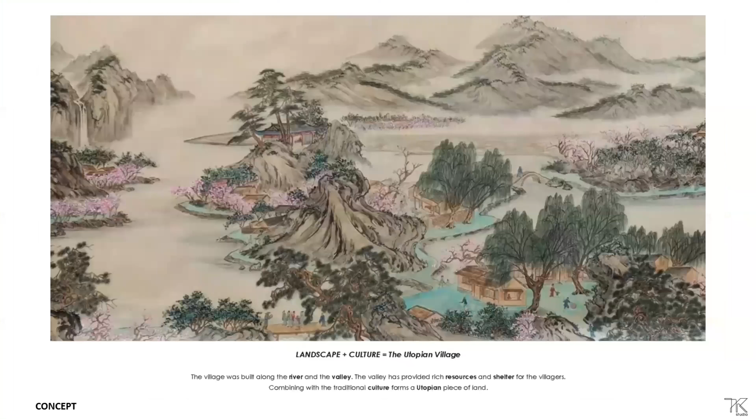Inspired by the famous peach blossom spring poem, we aim to create a pleasant landscape that is similar to the utopian landscape as in the poem. The ideal living environment situates in nature, where villagers are surrounded by mountains, the peach blossom trees and lake. The poem emphasizes the feeling of passing the threshold to disclose the heavenly landscape, which brings peace to the resident's heart. Art pieces inspired by the poem have illustrated the heavenly landscape.

Living in such an environment gives quality of living to the villagers, resulting in a happy and fulfilling life. So the villagers are very kind and warm to the visitor, creating the perfect society.

Mountain and all natural forces create different types of natural landforms, such as plateau, lake and river, and valley, which lead to different formations of human settlement. The landforms provide rich natural resources and shelter for the villagers.

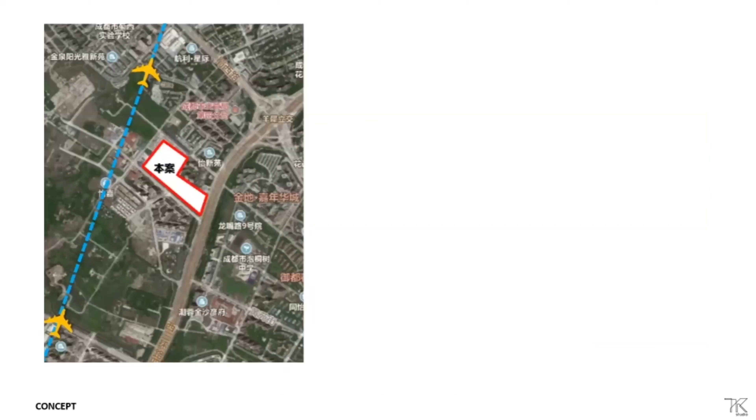We transform nature in this painting into a simplified form of landscape that fits with the modern lifestyle of the residents. We identify three types of landscape characters from the painting, namely the plateau, the lake, and the valley. These three distinctive landscape characters are favorable for developing human settlement.

The plateau is a broad and flat land, which can be used for multi-purpose activities. The lake has beautiful, picturesque landscape, allowing water activities for enjoying living. The undulating landform of the valley protects the privacy and maximizes security for the residents, while giving a sense of serenity.

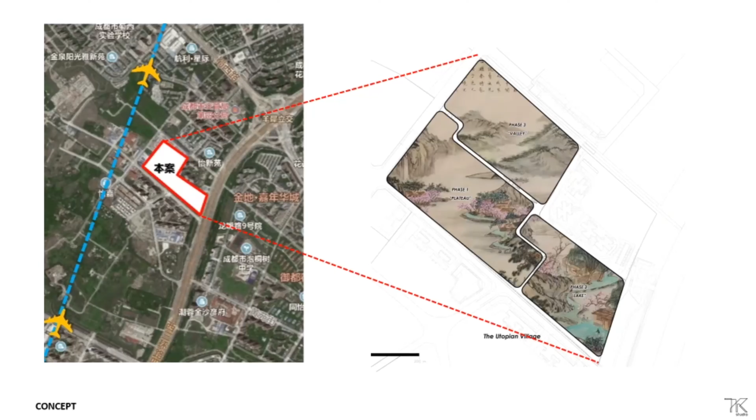The land is gradually deepened and ragged by natural forces and the flowing of rivers, forming valley, plateau, canyon, river, and lake over time. Over the years, tectonic movement and erosion create various types of natural forms. Everything is unexpected and organic, at the same time ragged and exciting, which celebrates the greatest value of nature.

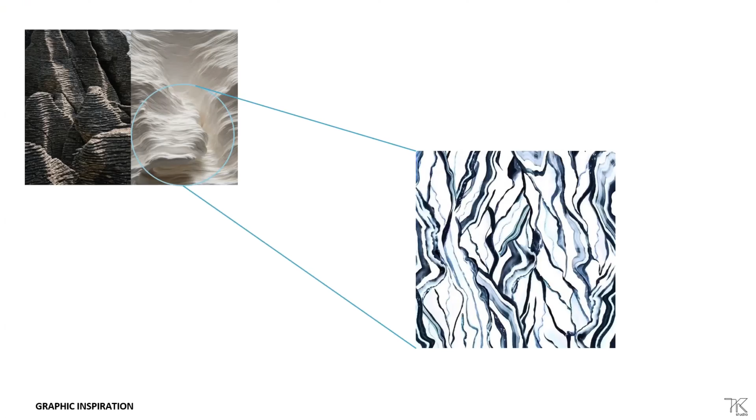The ragged line will be the main graphic form used in the project, symbolizing the result of the natural processes.

The plot of land will be divided into 3 parts and 3 phases: the plateau, the lake, and the valley. The 3 parts will be connected by a corridor of canyon. Entrances between plateau and valley, canyon, and forest will be the threshold where people enter the heavenly designed residential landscape.

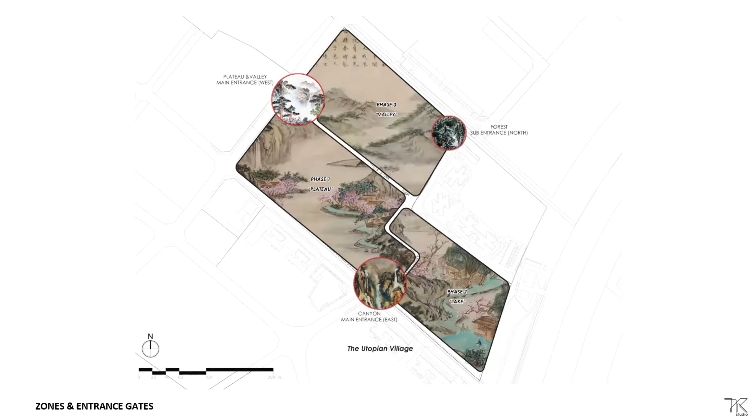The entrance of the project will be symbolized as a canyon. On the sides will be the plateau, the valley, mountains, and lake, which give places to the village settlement. This is the master plan of the project, where you can see a harmonious blend of distinctive landforms.

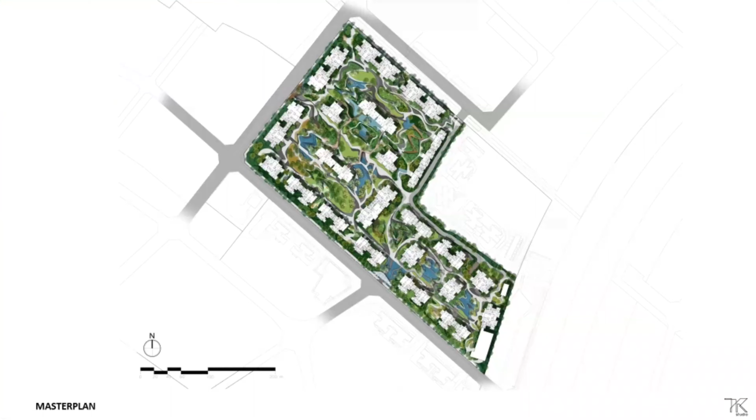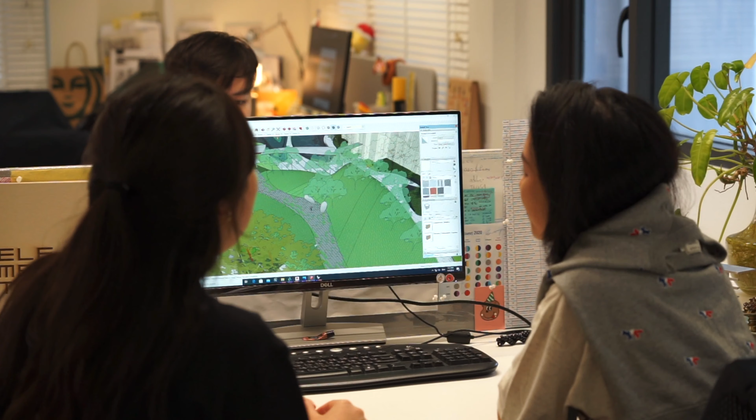The residential buildings will be put along the edge of the site, creating 3 major courtyards. All buildings will face the courtyards, so most units will enjoy a unique landscape scenery of their own. Different courts at the project are highly accessible. Residents can travel from one featured courtyard to another, giving the full experience of nature within Project 137.

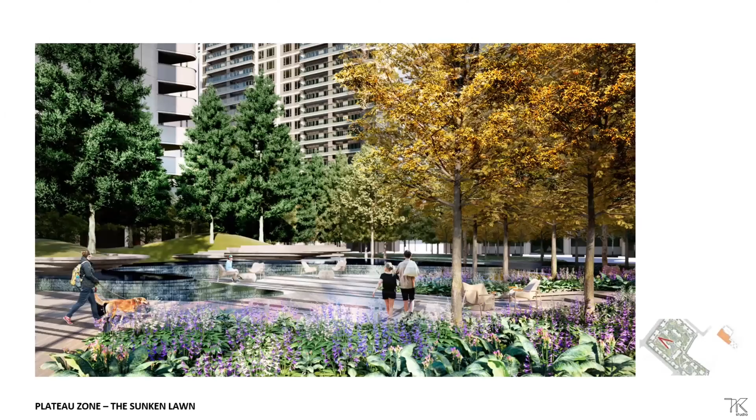This image of the plateau zone is filled with colorful flower fields. The planting integrates with a large piece of multi-purpose lawn and the dynamic sculpture at the center. The rolling landscape creates a dynamic sense, stimulating people to move along and enjoy the nice landscape. The flowering island, the sunken lawn, the stream water, the hill water feature.

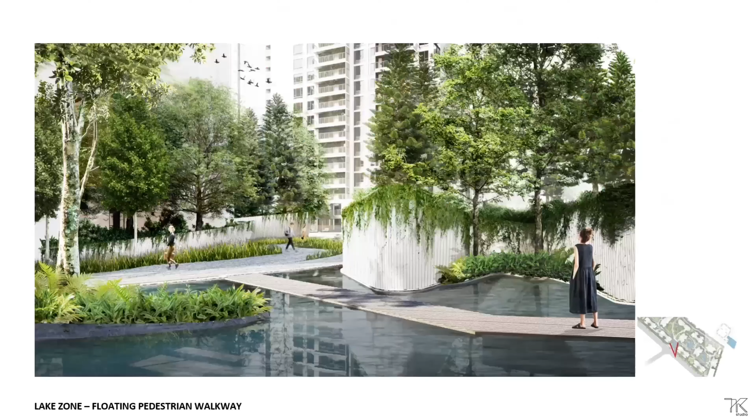The water features at the lake zone symbolize the reflective, calm and broad characters of a natural lake. Different levels of water create rooms for different types of activities. Water features such as fountains, floating walkway, sunken seat, and walkway in water invite people to enjoy the waterscape. Floating pedestrian walkway, the swamp water feature, the reflecting lake.

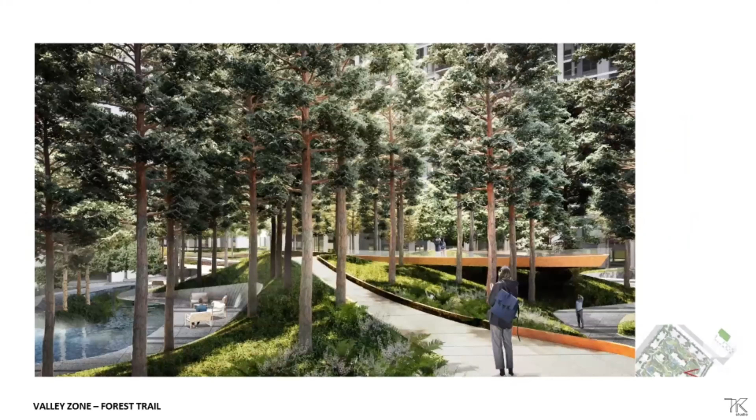The valley zone is an exciting court that has undulating landscape design. There will be a swimming pool situated at the lower ground level, just like swimming in the natural valley. The indoor and outdoor pools are connected and further linked to a reflective pond outside. Next to the pool area will be the pine forest, with a narrow meandering stream for relaxation. The observation point, the forest trail, the spring water feature, the cliff court, swimming pool at the valley zone.

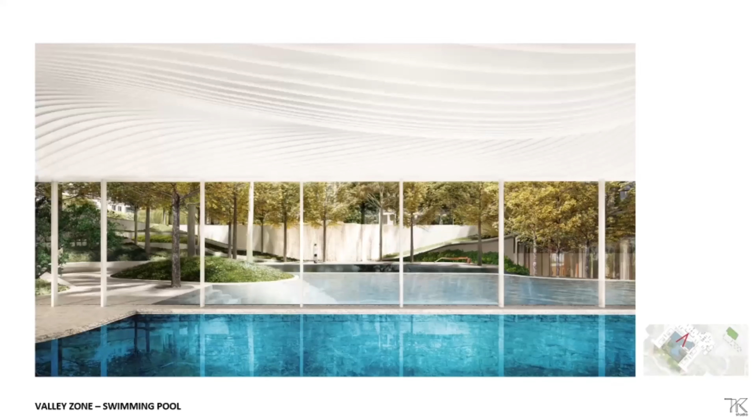137 project represents the peaceful origin of living with nature. Landscape in this project becomes part of the resident's daily life, providing highly accessible facilities and privacy for the residents. 137 project demonstrates a flexible modern living space where quality urban life is blended with a pleasant mixture of nature and landscape. The finest landscape design comes from the essence of nature, arts, and culture.

So we as landscape designers are the producers to bring the utopian landscape into reality, creating a high quality of life. Thank you.